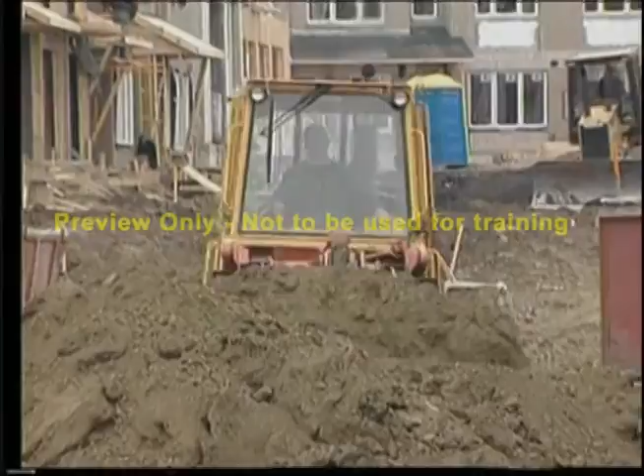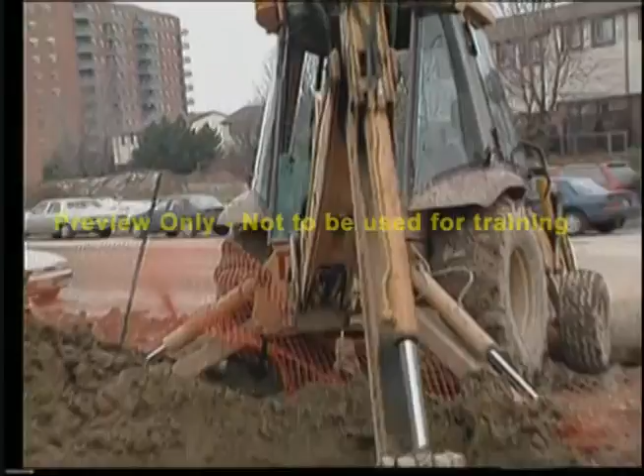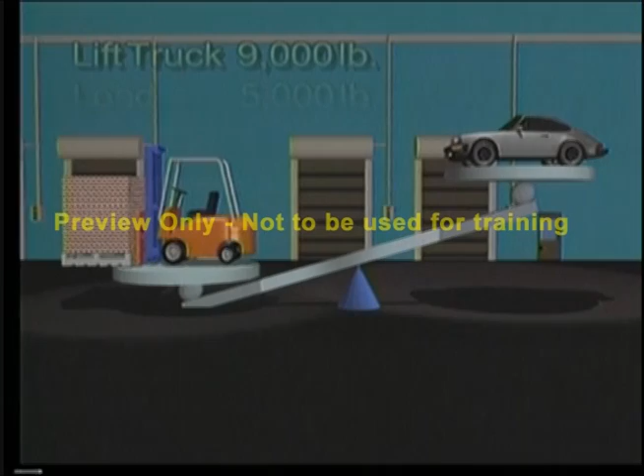Lift truck operators are just like millions of other professionals who earn their living by operating equipment or vehicles. It takes skill, training, and experience, realizing that no job on the ground or in the air can be done at the expense of safety. Remember, you're working on a piece of machinery that weighs about 9,000 pounds. With a load, it increases up to 14,000 pounds. That's equivalent to 6 cars.

Lift truck operators have a difficult job. They lift heavy loads and they maneuver in tight spaces. Safety isn't something anyone sets out to ignore, but tight schedules, heavy equipment, pedestrian traffic, and congested workspace can compromise safety any hour, any minute, any time.

Unfortunately, accidents can happen, but accidents happen more and cost more than we realize. Between lost time, increased insurance premiums, and litigation, it's common for accidents to cost a company over $1 million. Some companies cannot survive the aftermath and close their doors permanently. Then there is personal injury. Let's not forget the family, especially the children. One accident can cost a child a lifetime of happy memories.

But we can improve safety with the right training and the right rules. Government studies have shown effective training programs improve lift truck operators' safety performance by as much as 70%. OSHA, the Occupational Safety and Health Administration, estimates that there are 68,000 accidents every year in the U.S. involving lift trucks. Of those, over 100 people are killed. Here's how the accidents break down in terms of causes.

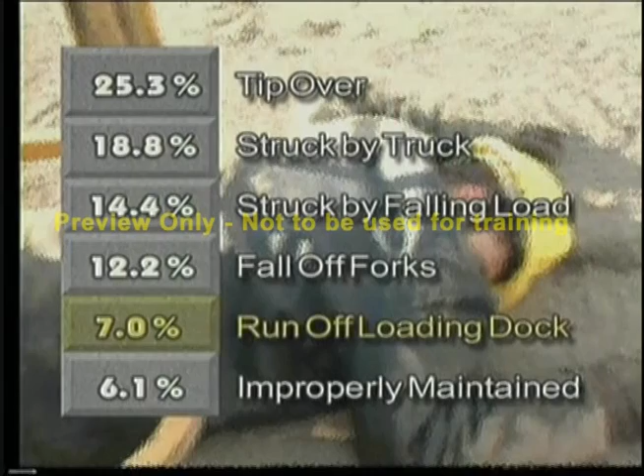25.3%, tip over. 18.8%, personnel are struck by a powered industrial truck. 14.4%, personnel are struck by a falling load. 12.2%, employee falls off elevated forks. 7%, the lift truck runs off a loading dock or other surface. And 6.1%, the lift truck is improperly maintained.

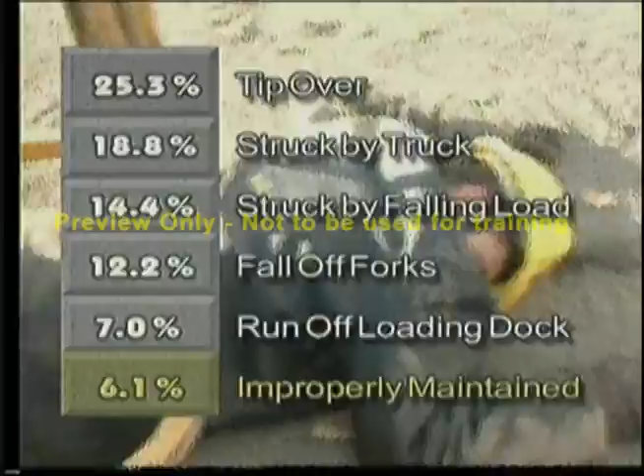With numbers like these and the cost of accidents, it's no wonder that OSHA requires that employers give proper training to all their lift truck operators. It also states that only trained and authorized personnel can operate a specific piece of equipment.

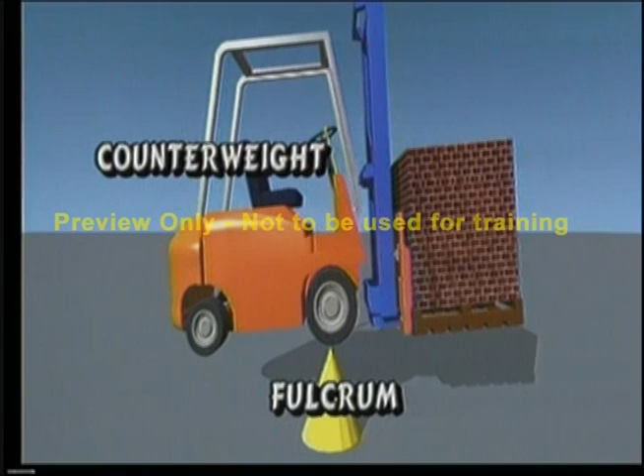Keeping your balance. You have to do it even when you're playing. This mother must think about load distribution and center of gravity just to keep this teeter-totter moving. A lift truck works much like a teeter-totter. The heavy counterweight on the back keeps the rear wheels on the ground. As you can see from this diagram, the front wheels act as a fulcrum between the counterweight and the load, just like the pivot point of a teeter-totter. It's the same principle of leverage that allows a young child to lift her mother.

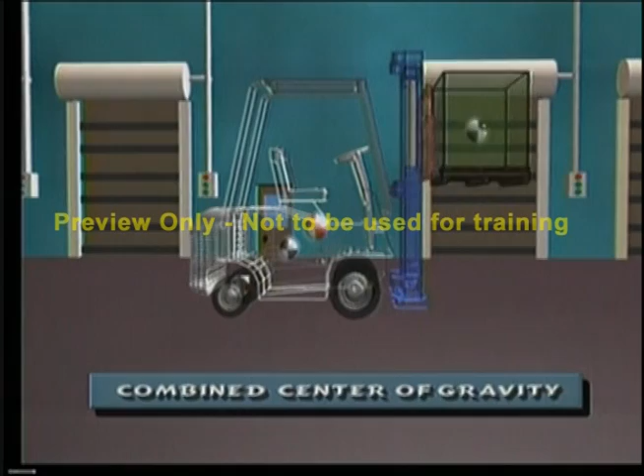Now, let's look at loads. Every object has a center of gravity. These three loads are all the same weight, but because of their different shape, they have a different center of gravity or balance point. When a lift truck picks up a load, the center of gravity of the truck and the center of gravity of the load will produce the combined center of gravity. The combined center of gravity will move in the same direction that the load moves.

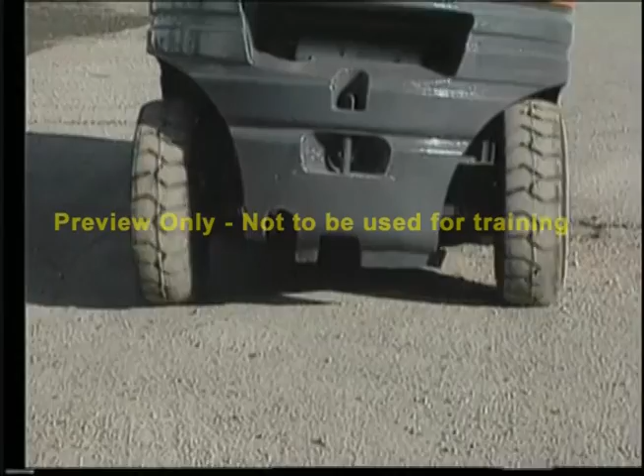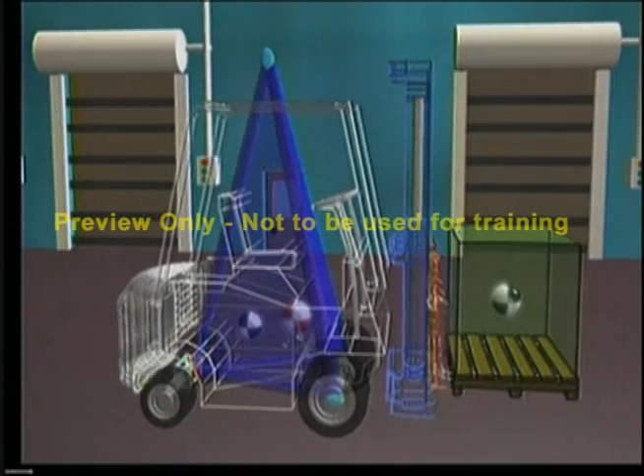A typical counterbalance lift truck has a three-point suspension system. The rear axle pivots at a single point in the center of the axle to compensate for uneven floors. This forms the stability triangle base. With the added dimensions of lift height, it forms a three-dimensional triangle similar to a pyramid. When the combined center of gravity stays within the triangle, the truck is stable. Move the center of gravity forward of the triangle, as when a load is too heavy or too high, the truck will tip forward. This is called longitudinal stability.

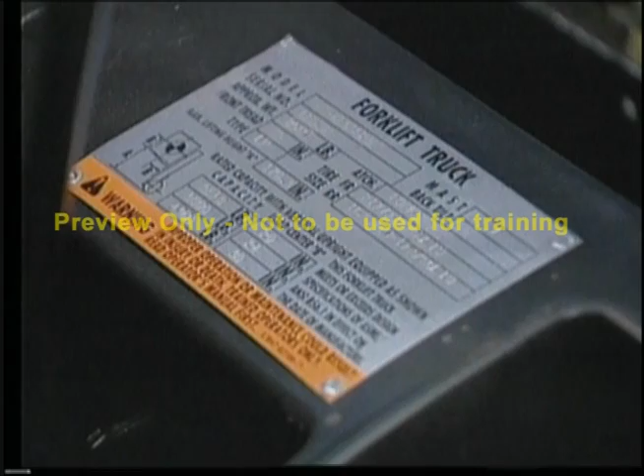Now, a truck must have a nameplate. This shows the maximum weight it is allowed to lift. This truck can lift 5,000 pounds, based on the load having a 24-inch load center. The load center is the distance from the face of the forks to the center of gravity of the load.

In this example, this 5,000-pound truck with a 24-inch load center will attempt to lift this 5,000-pound load. However, because of the unusual shape of the load, the center of gravity of the load is 30 inches from the face of the forks. Notice how the rear wheels lift off the ground when the capacity of the truck is exceeded. Now, if the truck lifts the load from the opposite side, the center of gravity of the load is only 18 inches from the face of the forks.

This load can now be safely lifted. The nameplate will also show the maximum lifting height. The higher the lift, the lower the capacity.

Attachments such as this carton clamp actually reduce the capacity in two ways. First, the carton clamp moves the load away from the operator, reducing load capacity. Secondly, the weight of the clamp will further reduce load capacity. This 4,000-pound truck will now be rated or limited to lifting a load of 2,500 pounds or less.

If a new mast is installed that changes the maximum lifting height, or if an attachment is changed or installed, a new nameplate must be requested and installed.

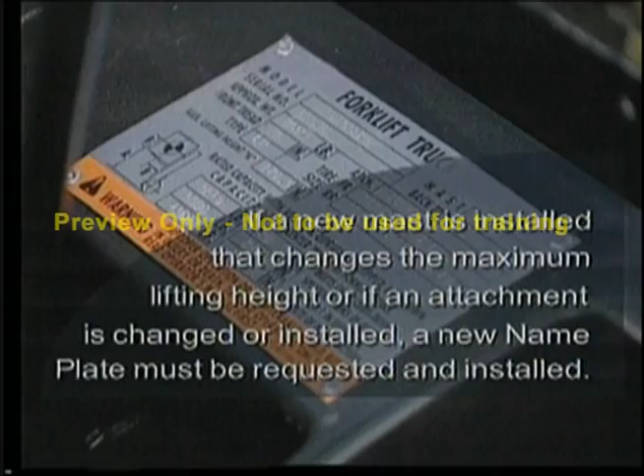Over 1/4 of all lift truck fatalities occur when a lift truck tips over. Understanding the principle of lateral stability will reduce the chance of your truck falling sideways. What do you think? Is a lift truck more stable with a load or without a load while turning? As this lift truck turns with a load, the combined center of gravity moves towards the edge of the triangle.

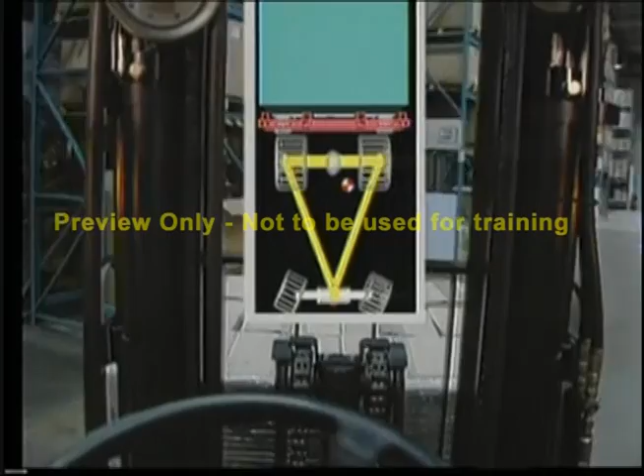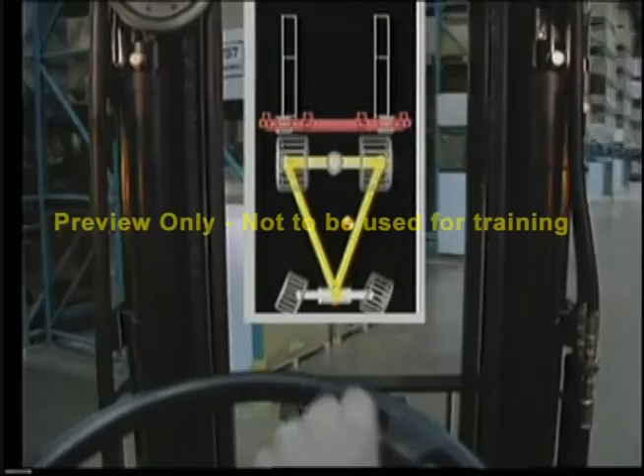Now, notice what happens when we complete a similar turn, this time without a load. Notice the center of gravity is much closer to the edge of the triangle. The closer it is, the less it takes for the truck to become unbalanced and tip over. This is why an unloaded truck should be operated just as carefully while cornering.

Let's look at some causes of tip-overs. Sharp turns, raised masts, unstable loads, potholes, uneven surfaces, wet surfaces, and driving on ramps, to name a few. On October 17, 1994, Scott was operating a lift truck outside. He was attempting to pick up a load of empty pallets. While making a sharp turn, he hit a small pothole.

Scott was fortunate. He had been properly trained. He knew how to best survive a tip-over situation. First of all, Scott was wearing a seatbelt. When the lift truck tipped, he stayed inside the operator compartment, his best chance for survival. He braced his feet and held on tight to the steering wheel with both hands while leaning in the opposite direction of the fall. Scott was able to escape with minor injuries.

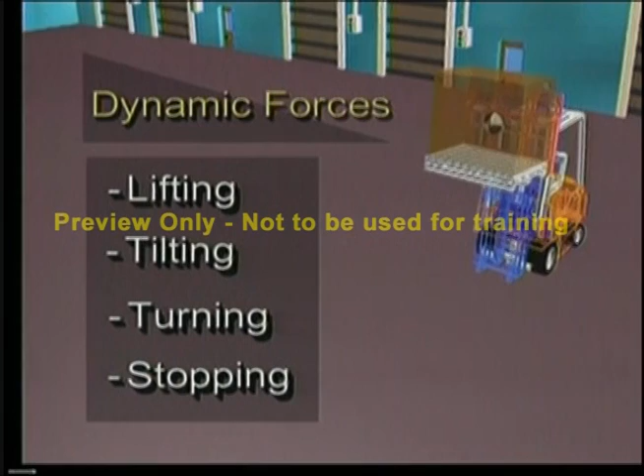Never attempt to jump out of your lift truck if you encounter a tip-over. Had Scott tried to jump clear of the truck, the overhead guard would have struck him, crushing him to death. When a lift truck is in motion, the dynamic forces such as lifting, tilting, turning, and stopping can cause the combined center of gravity to move outside the stability triangle, causing the lift truck to tip over.

When operating a Class 1 stand-up lift truck, operators must be aware of the causes that result in a tip-over situation. These are overloading, traveling with elevated loads, braking or accelerating sharply while turning, handling off-center loads, traveling at excessive speeds, falling from docks, dock plates, and trucks and trailers, to name a few.

With a counterbalance lift truck, the operator is instructed to stay with the truck when it tips over. Stand-up lift trucks are different. In the event your stand-up lift truck is involved in a tip-over or off-the-dock accident, you can be severely injured or killed. To minimize your risk of injury, it is recommended that you step off the rear of and away from your stand-up truck. Safety authorities such as OSHA state, when a stand-up rider tips over laterally, the operator must be trained to step off the vehicle toward the rear of the vehicle.

In this example, the truck is turning a corner too fast with the load raised. As the truck begins to tip, the operator senses this emergency situation and steps out of the operator compartment. In this next situation, the truck is approaching the loading dock too quickly and slides on a wet surface. Unable to stop, the truck continues over the edge. The operator senses this emergency situation and steps out of the operator compartment.

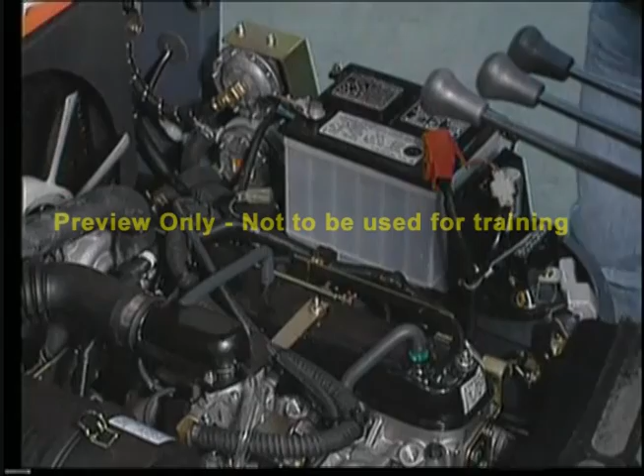It's the operator's responsibility to inspect the lift truck before the beginning of each shift and keep a written record. At times, this task may seem unimportant. However, 6.1% of accidents are caused by improper maintenance procedures. The objective of the inspection is to look for damage and to make sure the truck is in safe operating condition and meets the manufacturer's specifications.

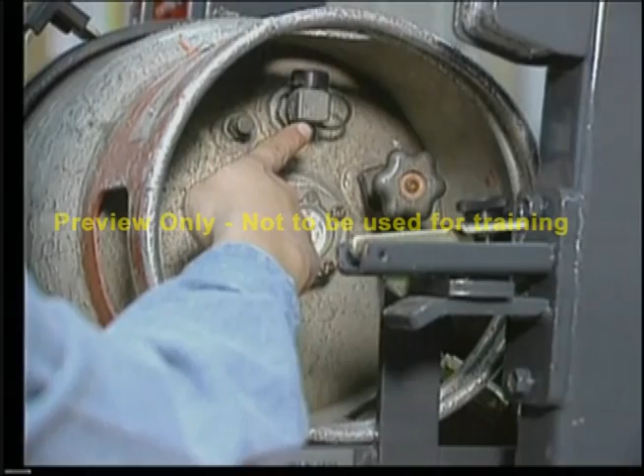A good place to begin an inspection is at the fuel source. In the case of an electric truck, start at the battery. With a propane truck, begin with the liquid propane cylinder. Make sure the locating pin is in place and the pressure relief valve is pointing upwards. Check the fuel level. Don't take a chance on running out where it is dangerous to refuel.

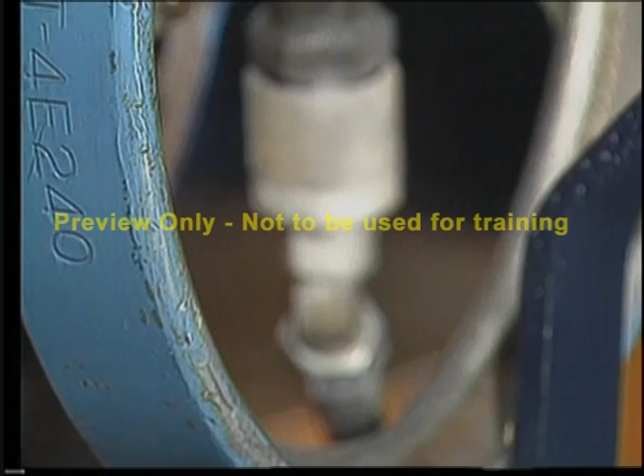Check the connectors and hoses. Then listen, smell, and look for leaks. Frosting will indicate even the smallest leak. Be careful. Touching this with your bare hands can cause a serious frost burn. Check the cylinder tie-down latches to make sure the propane cylinder is secure.

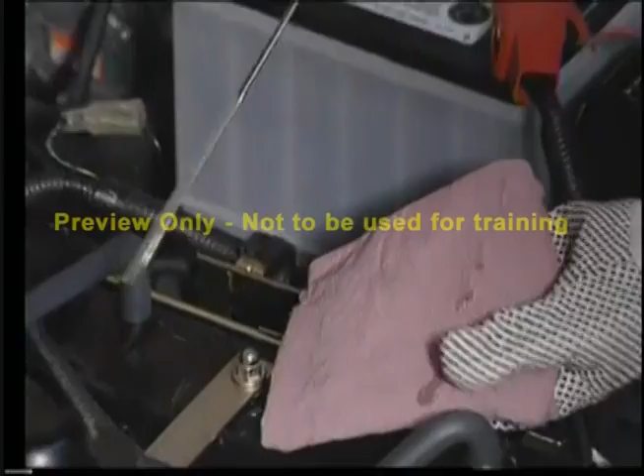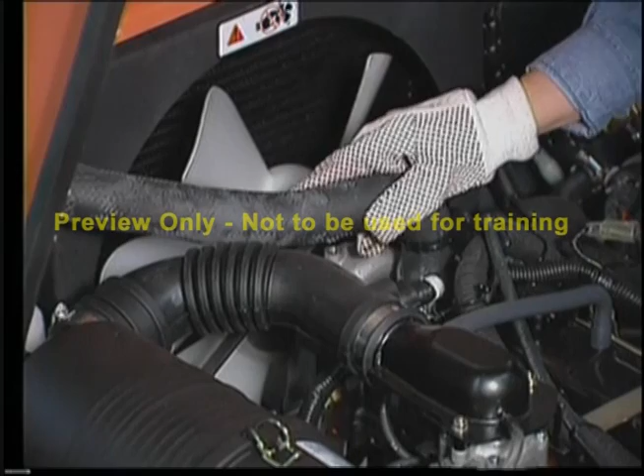Open up the engine cover and inspect the engine compartment and fluid levels. Check the battery, the engine oil, transmission fluid, the fan belts and hoses. It's important that they are not frayed or worn.

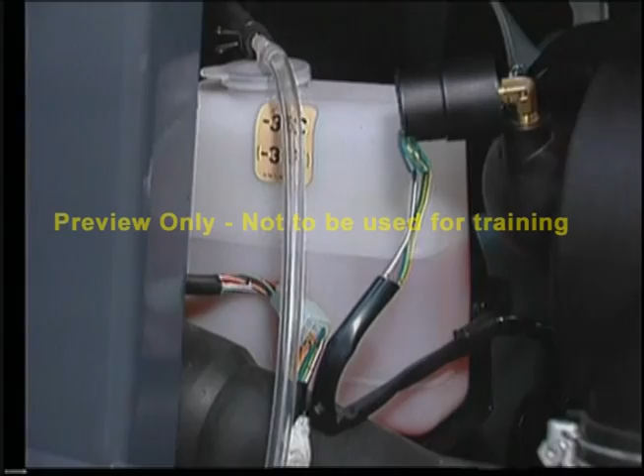Check the brake fluid reservoir, hydraulic oil level, the radiator coolant, and finally, inspect the air filter. A dirty filter can increase harmful or poisonous exhaust gases. Close the engine cover and secure the propane cylinder.

Next, inspect the tires and wheels on the right side of the truck. Ensure the overhead guard is in good shape. Are the lug bolts present and tight to the touch? If not, call for repairs. Loose or missing lug bolts can cause damage to the truck or injure someone. Remember, do not operate the lift truck until repairs are made.

Are there chunks of tire missing? Cuts or objects embedded in the tires? How about wire, plastic strapping, string or foreign objects lodged in behind the wheel? These can cause costly damage or serious injury.

If you're inspecting a truck with pneumatic tires, check the air pressure as outlined in the operator's manual. An underinflated tire will lean the truck to one side and will decrease stability. Notice that when the load is being lifted, it is actually moving away from the center of the truck. It wouldn't take too much to tip this truck over.

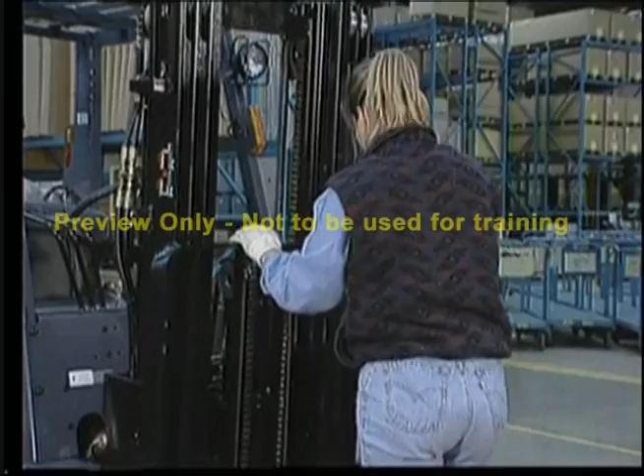Inspect the hydraulic tilt cylinders and lift cylinders. They must be free from leaking hydraulic fluid. Inspect the hoses around the mast. This is where leaks often start. Make sure the mast channel is free of foreign objects, such as pieces of wood or wire. Complete a thorough examination of the wheels and tires on the left side of the truck.

To start the engine, make sure the parking brake is on. Listen for any unusual noises as the engine warms up. Pull the lift lever and fully raise and lower the forks to ensure free movement of the mast. Once the forks have been lowered, test the side shifter or any attachments if installed. Tilt the mast back and forth, making sure all hydraulic movements are smooth and operational.

Release the parking brake and drive forward or reverse about 20 feet in total, ensuring the steering and brakes are working properly. Check the brakes. The brake pedal must not reach the floorboard. If it does, the brakes are not functioning properly and the truck should be taken out of operation until repaired.

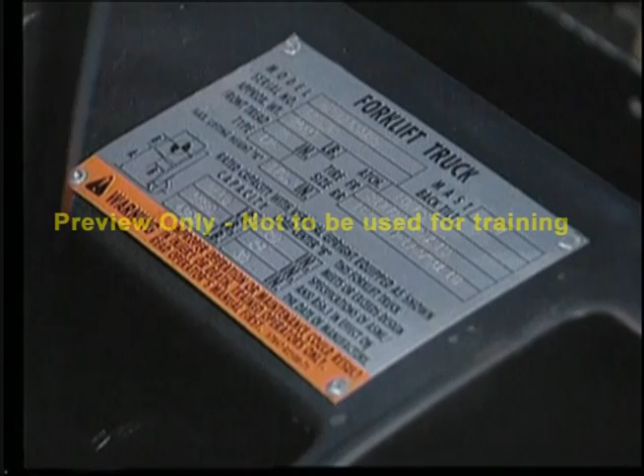A lift truck cannot be put into service until it has a legible manufacturer's nameplate securely fastened. Make sure the seat belt is not frayed or torn and that it latches properly. All safety labels and instructions must be in place and readable. The overhead guard and load backrest extension are important safety features. Make sure they are in place and secure.

Finally, complete and file an operator checklist and report any defects to your supervisor in writing. If you're on the job and notice that your truck is unsafe to operate, park it and tag it out of operation. Report specific problems to your supervisor. Remember, failure to do this could cause injury to yourself and to the employees working around you.

Rules of the road. If you decide to ignore them, you endanger your life and the lives of others. There are federal laws that have established rules for lift trucks. OSHA requires that you be trained and authorized by your employer to use a specific lift truck.

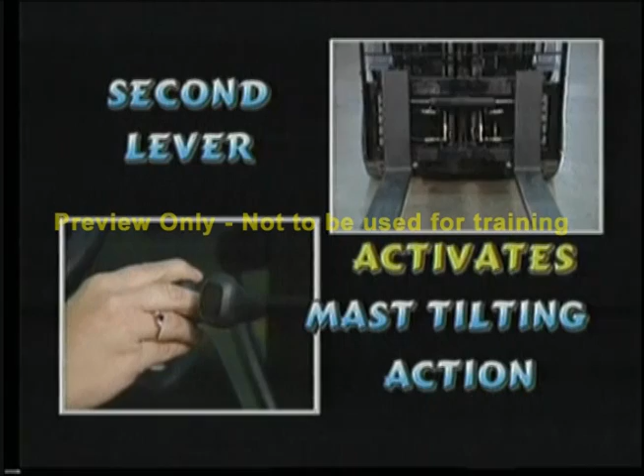Lift trucks have similar controls as cars do: a steering wheel, accelerator pedal, foot brake, parking brake, and key switch. In addition, lift trucks have a directional control lever and hydraulic control levers. On most trucks, the first lever activates the lift and lower control of the forks and mast. The second activates the mast tilting action. The third works as an auxiliary function for an attachment such as a side shifter or a clamp. Remember, using attachments requires specialized training.

Lift trucks need to be highly maneuverable to work in tight places. That's why they steer from the rear. Watch out for tail swing when traveling forward. When cornering, keep the front wheels close to the inside aisle and start turning. This allows room for the rear end to swing out in the opposite direction.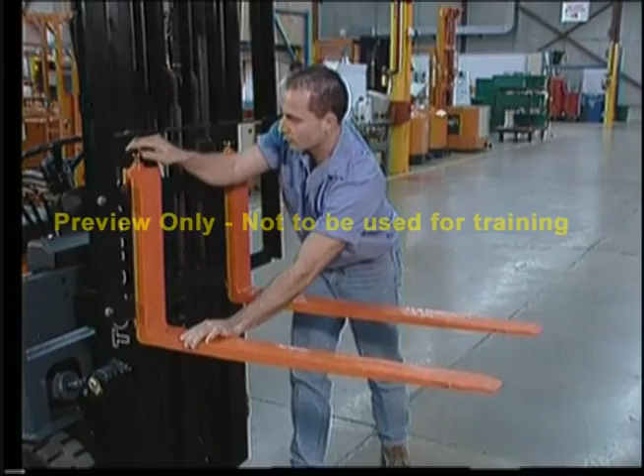Before you pick up a load, make sure your forks are spread as far apart as possible and are long enough to stabilize the load. And remember that the forks must be at least 2/3 of the length of the load to keep it balanced. If the load is over your lift truck's capacity, it must be broken down into smaller loads or use another truck with the proper capacity.

While traveling, make accelerating, braking, and turning a smooth and fluid motion. This will minimize the chance of the load falling off the forks. Keep in mind that 14% of all fatalities involve someone being hit by a falling load. Loads must be stable before you move them. Never reach through the mast to reposition a box. Instead, get off the truck. Make sure the load is against the load backrest extension with the mast slightly tilted back. The pallet should be no more than 4 inches off the ground while traveling.

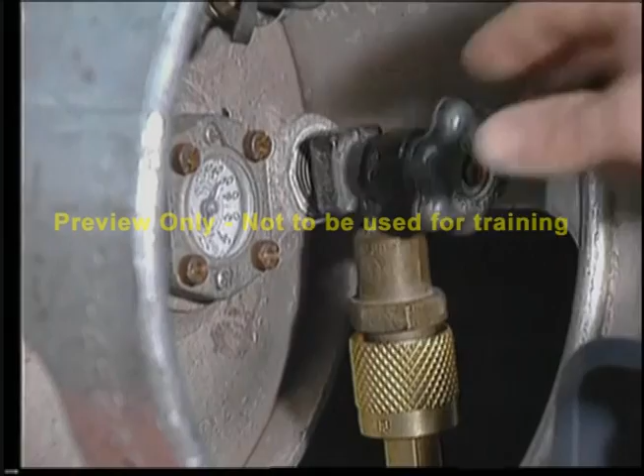Turn off the valve on the propane cylinder to prevent a fuel leak. Disconnect the battery connectors if using an electric power truck.

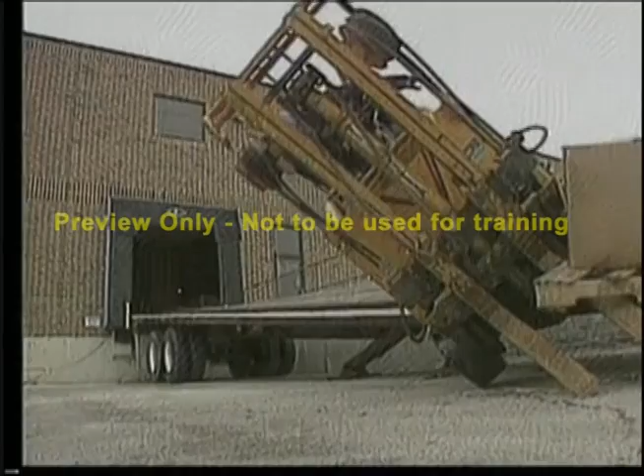Loading docks are busy places for pedestrians and equipment. On average, a lift truck may pass over a dock 100,000 times per year, so there are plenty of chances for accidents. Statistics show that over 7% of accidents happen in the loading dock area. If the area between the trailer and the dock is not safely secured for any reason, the lift truck can fall through the gap, causing injury or death.

A common cause of trailer separation accidents is early departure. This is where a tractor-trailer driver assumes loading or unloading is complete and pulls away from the dock while the lift truck is entering or leaving the trailer. If the lift truck does not have enough time to stop, it can fall off the dock or trailer. Even if wheel chocks are still in place, they offer little protection if the tractor-trailer driver leaves before it is safe.

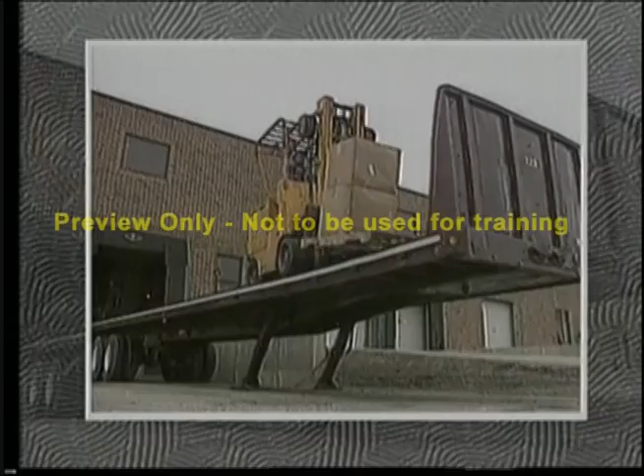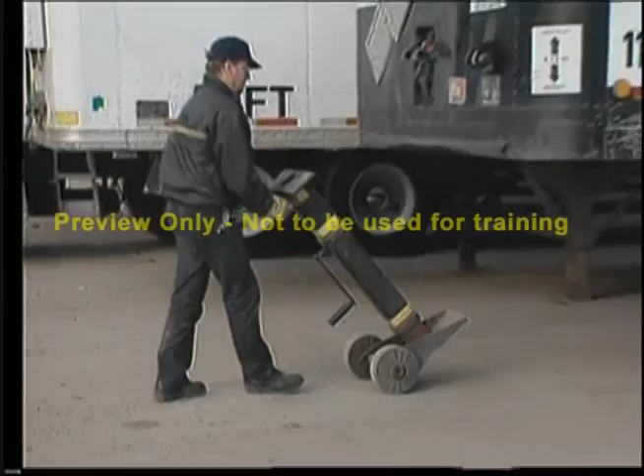Landing gear collapse is another safety hazard. When the tractor has been removed from the trailer, certain safety precautions must be taken. If the landing gear is weak or corroded, it may collapse due to the weight and forward motion of the forklift entering the trailer. Trailer upending is another hazard caused by the heavy loads being placed in the nose of the trailer that exceeds the counterbalance effect of the trailer's rear axle. Therefore, uncoupled trailers must be secured with a support jack before entering with a lift truck.

The most common form of trailer separation is trailer creep. As the lift truck travels on and off the trailer, its momentum inches the trailer away from the dock. To demonstrate this, the wheel chocks have been removed and the brakes released from this tractor trailer. As this moving lift truck stops, its weight forces the entire rig to move away from the dock.

This is why the tractor trailer must be safely secured against the dock. Tractor trailer brakes must be engaged and wheel chocks must be properly installed. However, wheel chocks have their limitations and could fail if placed on ice, gravel, or sand. For increased protection against these types of accidents, many companies have installed vehicle restraints that either hold the trailer firmly against the dock by engaging the trailer's ICC bar or by locking the trailer rear wheels with dual steel barriers.

Lift truck operators are responsible to ensure the trailer is ready for safe loading or unloading. Once the tractor trailer is secure, carefully position the dock leveler in place. Make sure there is proper lighting. Poor lighting increases the chance for injury and/or product damage. The floor of the trailer must be inspected to ensure it is in good condition, and the combined weight of the lift truck and load do not exceed the maximum weight capacity of the trailer.

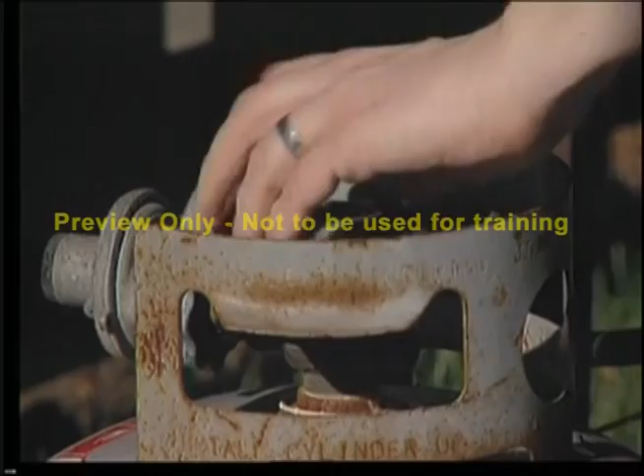Liquid propane gas is a popular fuel for many uses. When handled properly, it's safe. When handled improperly, it can cause serious injury or death. Don't let this happen to you. Liquid propane gas is a liquid that normally boils at minus 44 degrees Fahrenheit. But when stored in a high-pressure cylinder and compressed 270 times, it stays liquid at room temperature.

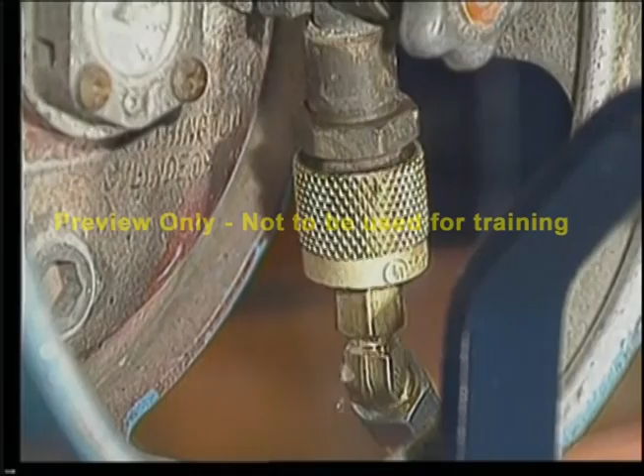If released, the expanding gas can cause a serious frost burn when it comes in contact with unprotected skin. For this reason, eye protection and heavy gloves should always be used when handling liquid propane gas. Liquid propane gas is heavier than air and will travel along the ground like water. Escaping liquid propane gas can be extremely dangerous if it is allowed to move to a low area where it can collect and ignite.

Here's how to minimize the chance of liquid propane gas leaking while changing the cylinder. These procedures must be followed. Start by parking the lift truck. Set the parking brake. Lower the forks. Place the transmission in neutral and leave the motor running. Put on your protective safety gear.

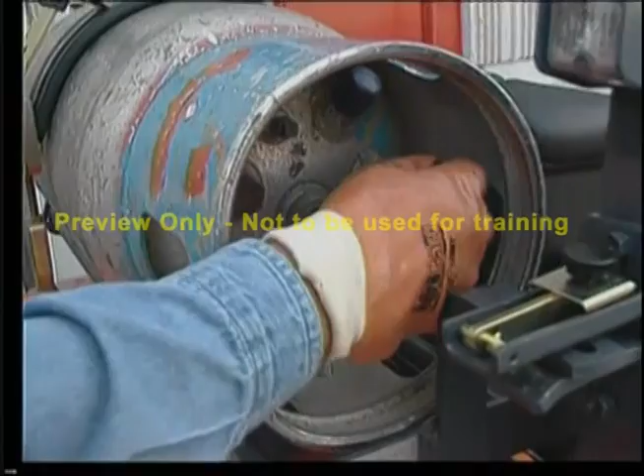Then, turn off the valve on the liquid propane gas cylinder and allow the truck to stall due to lack of fuel. This reduces the pressure of the gas in the fuel lines. Next, turn off the ignition and then try to restart the motor. If the truck will not start, you may proceed. First, uncouple the hose from the valve. Remove the cylinder and store it outside in a safe and approved method.

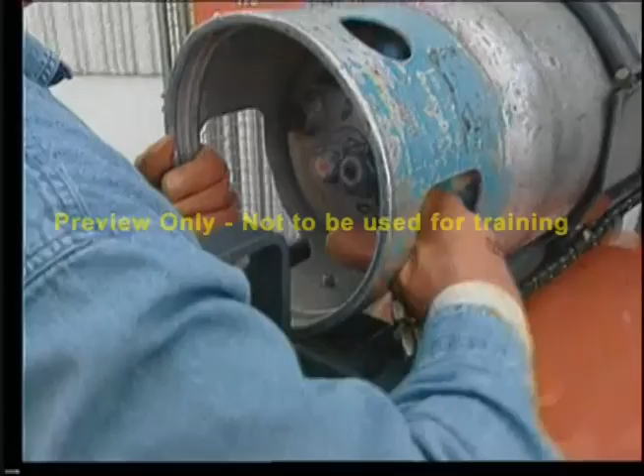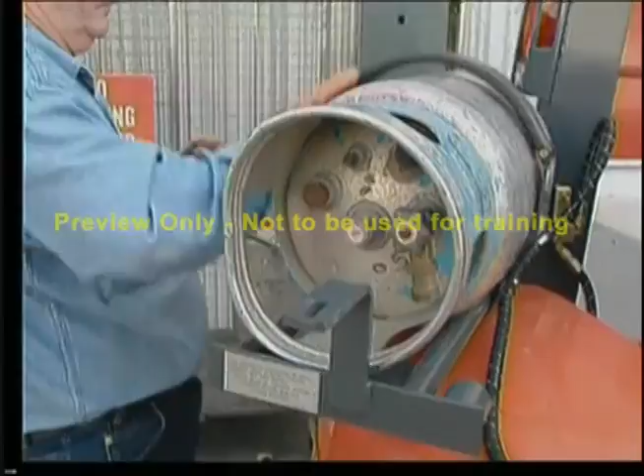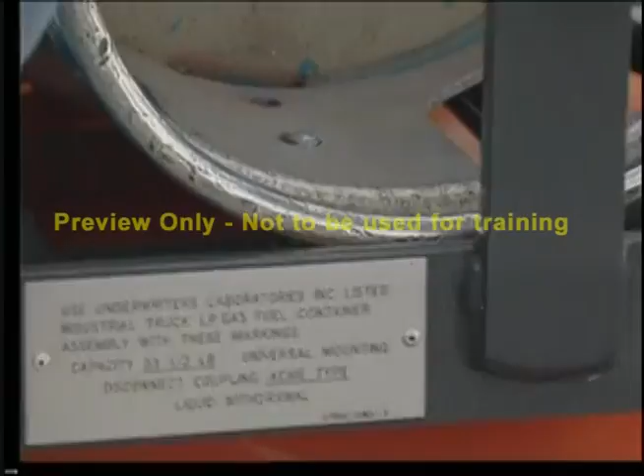When installing the full liquid propane gas cylinder, handle it with care. The liquid propane gas is under high pressure. Check the new cylinder for proper seals and gaskets. Don't risk leaks with a bad O-ring. Now, place the cylinder on the locating pin and set it in the liquid propane gas tank bracket. Remember, the pressure relief valve always points upwards.

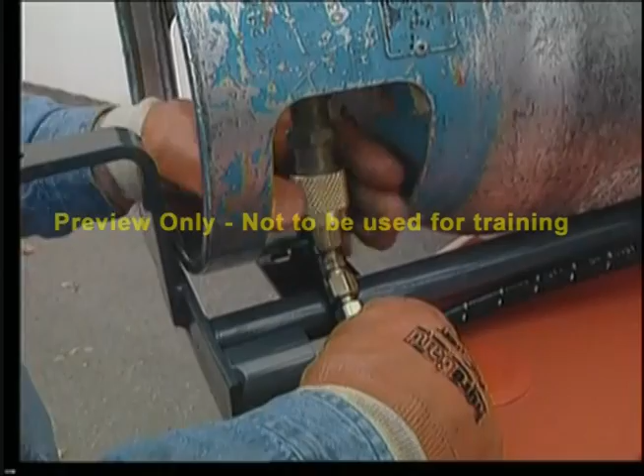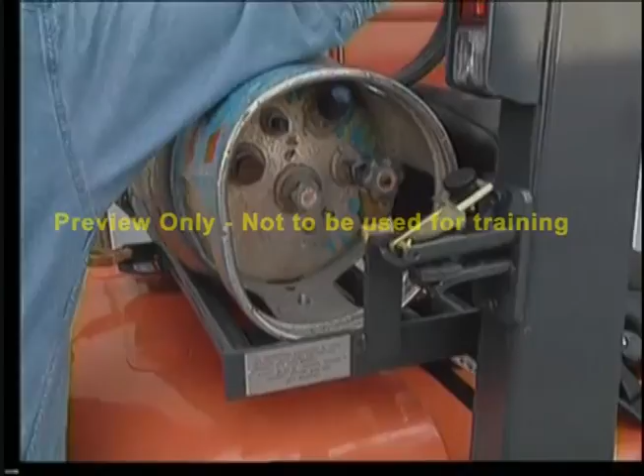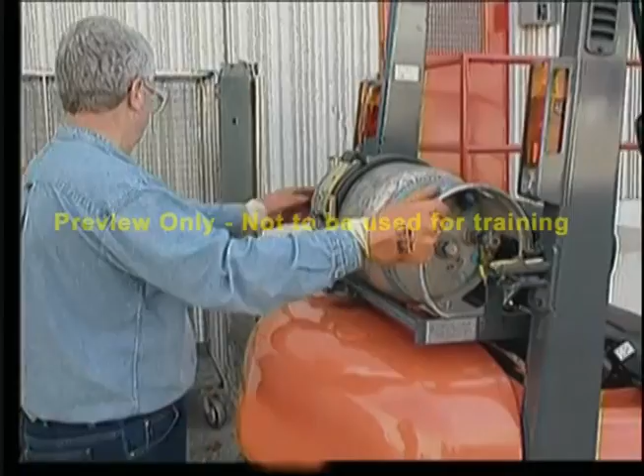Secure the cylinder with the bracket restraints. Open the valve slowly. Look, listen, and smell for leaks. Frost on a fitting is a sure sign of a dangerous leak. Ensure that the cylinder is secure. Now you're ready to go.

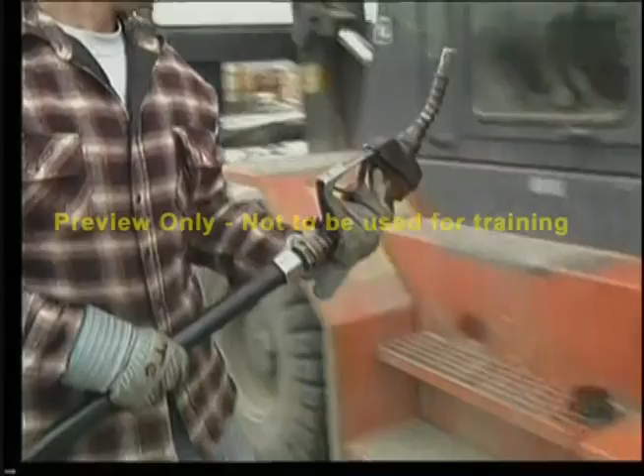For diesel or gasoline refueling, drive the lift truck close to the pump and turn off the truck. Open the gas cap and feed the nozzle into the tank opening. Turn on the pump and proceed to fill the tank. Do not fill the tank completely. This will minimize the chance of fuel spilling out while driving.

When finished, replace the cap and clean up any overspill with a cloth. Finally, start your truck and proceed with your work in a safe manner.

In many ways, industrial batteries are like young infants. They need to be changed and cleaned regularly. If they become too tired, they start to act up. They constantly need to be replenished with water. But given too much, they'll spit up all over. If you take care of your battery, it will last for many years. Ignore it, and you will have problems.

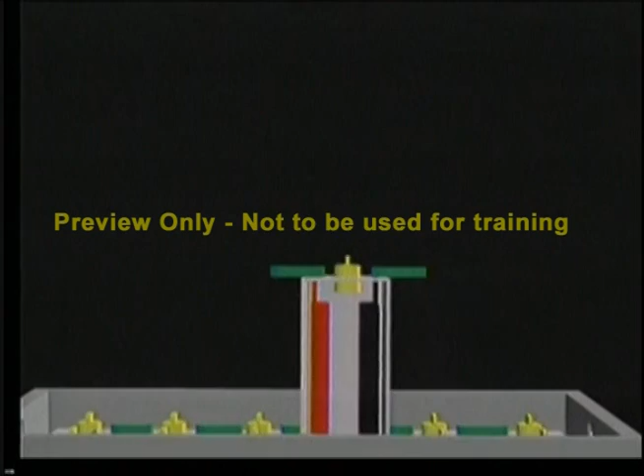The typical industrial battery is really a series of individual cells joined together by lead connectors. Each cell has a positive post and a negative post. The cell is filled with a solution of sulfuric acid and water called electrolyte. Each cell generates approximately 2 volts of electricity.

When it's time to recharge the battery, park the lift truck with the emergency brake on. It is best to recharge the battery when it's out of the truck. But if that's not possible, fully open the battery compartment to allow heat and hydrogen gas to escape. Hydrogen is a highly flammable gas, and for this reason, batteries must only be charged in well-ventilated areas. No smoking or open flames are permitted.

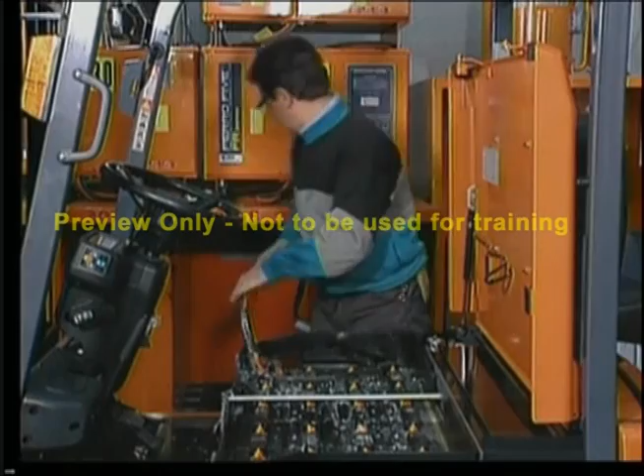Unplug the battery connector from the truck and attach the charger connector to the battery, never to the truck. Check the cables for wear and the connectors for damage. Turn on the charger following the manufacturer's instructions. When the charging process is complete, always turn the charger off before unplugging the connectors.

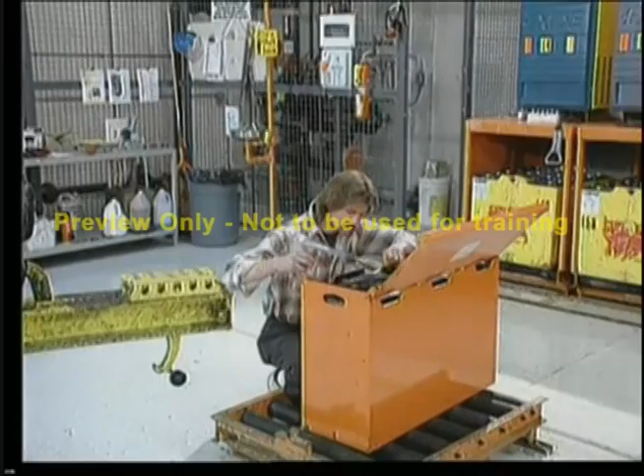In March of 1995, a newly trained operator was testing the electrolyte with a hydrometer. He was not wearing any face protection.

He squeezed the hydrometer too hard. This caused the electrolyte to spray up on his face. He immediately went to an eye wash station. Luckily, he was trained on what to do if he came in contact with acid and suffered no injuries.

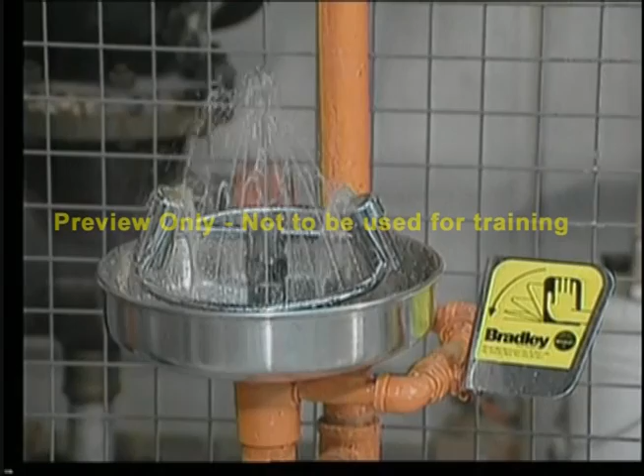You should always wear protective equipment when you're anywhere near battery acid. Gloves, goggles, and a body shield are mandatory. Have an eye wash station nearby. If acid gets into your eyes, go immediately to the eye wash station and run water over the affected area. Then, get medical attention. After charging, remove the caps of 3 or 4 cells to determine the electrolyte level.

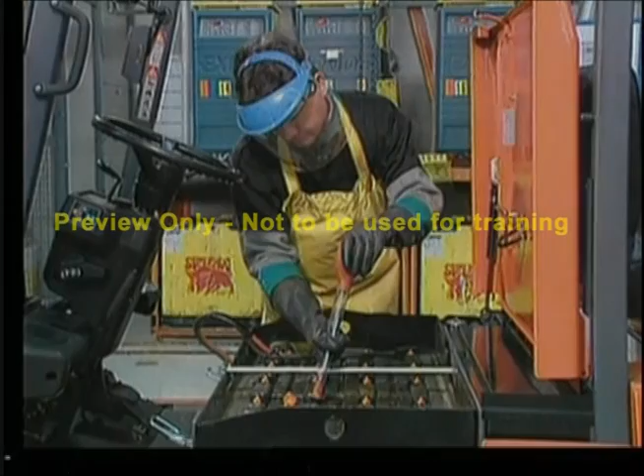Only a flashlight can be used to look into the cells. When the battery is fully charged, the electrolyte has a high acid content. This can be tested with a hydrometer. By testing a small sample of electrolyte, you can determine how much energy is in a cell. This will also locate bad cells in a battery. A full reading should be around 1.280. As the battery is discharged, the acid level becomes weaker.

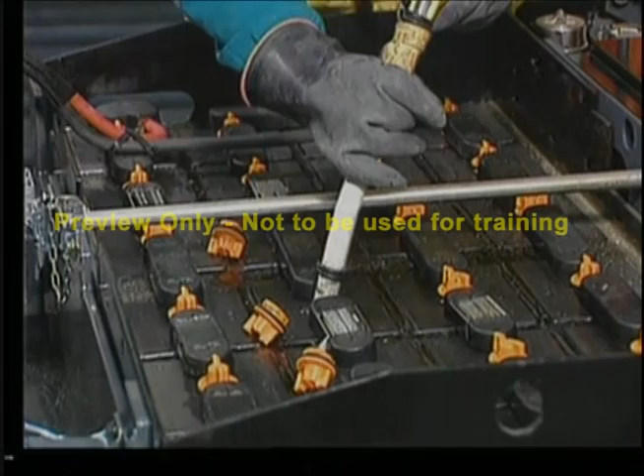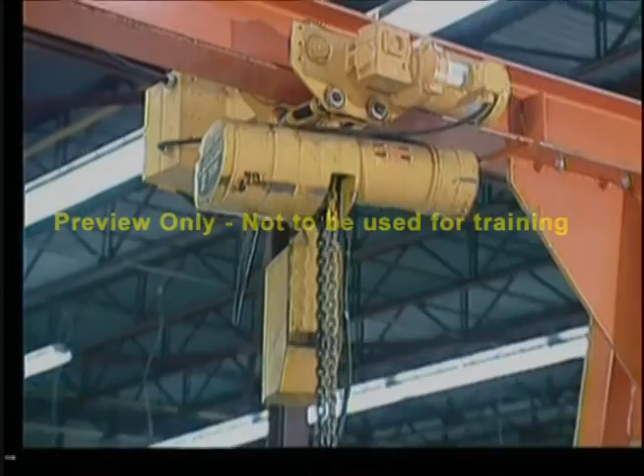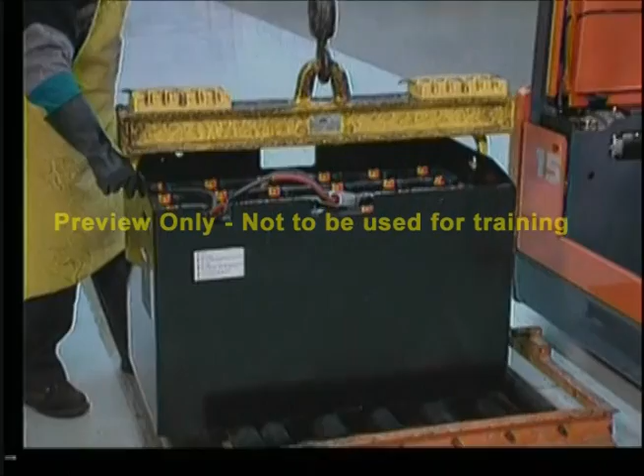Many people use a crane to remove the battery from a lift truck for maintenance. Carefully attach an approved insulated lifting beam to the battery and lift it out. Place it near the charger, then pick up the freshly charged battery. Be careful, the battery weighs thousands of pounds and can crush your hands or feet. Use only equipment designed for this purpose.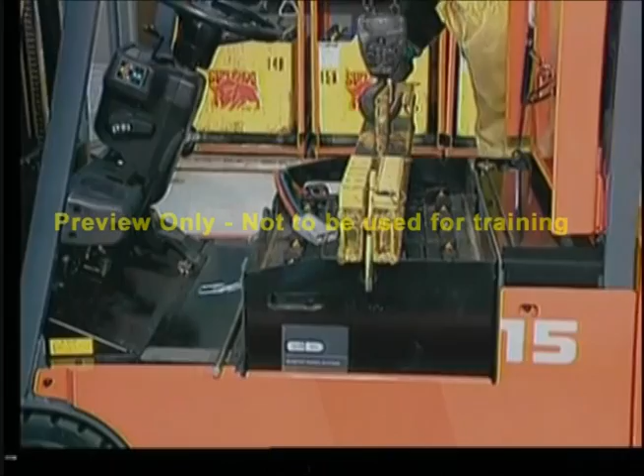Electric trucks depend on the battery to balance their loads. Use a battery that is the proper weight and voltage. Check the lift truck's nameplate and compare it with the battery's weight and voltage as marked on the battery casing. Join the connectors and close the cover. Some trucks use battery slides. Remove the safety gate and roll the battery out of the truck.

In order to align the fresh battery to the battery compartment, connect extension cables. Then, drive the truck into position. Remove the extension cables and roll the fresh battery into the truck. Replace the safety gate, and then connect the battery cables.

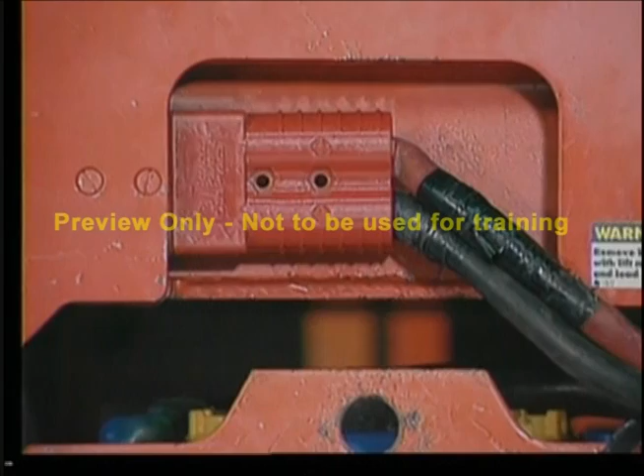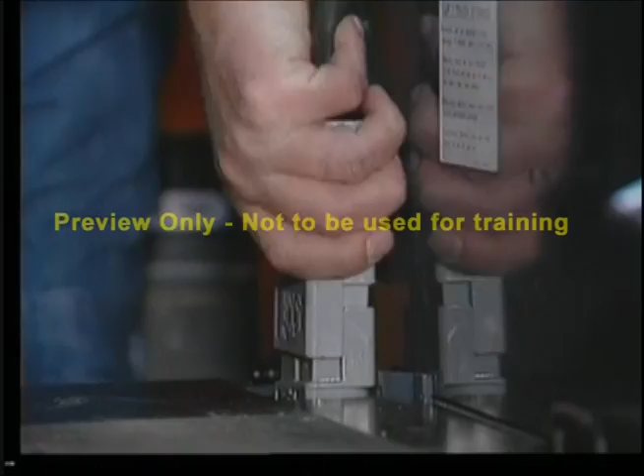Here are 10 tips on how to get the most out of your battery. Follow the manufacturer's instructions. The life of a battery and your lift truck controls can be severely shortened by not following the manufacturer's instructions on charging and maintaining the battery. Inspect the connectors. A loose, cracked, or pitted connection can cause arcing or sparking. Don't use the connector as a switch. Always shut off the charger when connecting or disconnecting the battery.

Add water after charging. Charging increases the electrolyte levels in cells and can cause overflowing. Overflowing means a loss of electrolyte and damages your truck. Keep it clean. Batteries and their compartments should be kept clean and dry. If electrolyte is spilled on top of the battery, neutralize it immediately with a solution of baking soda and water. Always wear a face mask or goggles, rubber gloves, and a rubber apron when cleaning batteries. Don't lay tools on top of the battery.

Battery gases are explosive. Keep vent caps in place. Vent caps allow gas to escape and keep foreign objects from falling into the cell. Remove vent caps only to add water or to take hydrometer readings. Keep your battery cool. A normal charge can increase the temperature of a battery by 15 degrees or more. Operating hot batteries shortens their overall life. Allow the battery to cool down at least the same length of time that it was charged.

Don't overcharge. No amount of overcharging can increase battery capacity, and it substantially shortens battery life. No smoking, sparks, or open flames in the area. Charge in a well-ventilated room. If electrolyte gets in contact with your skin or eyes, rinse thoroughly with water for at least 10 minutes and get immediate medical attention.